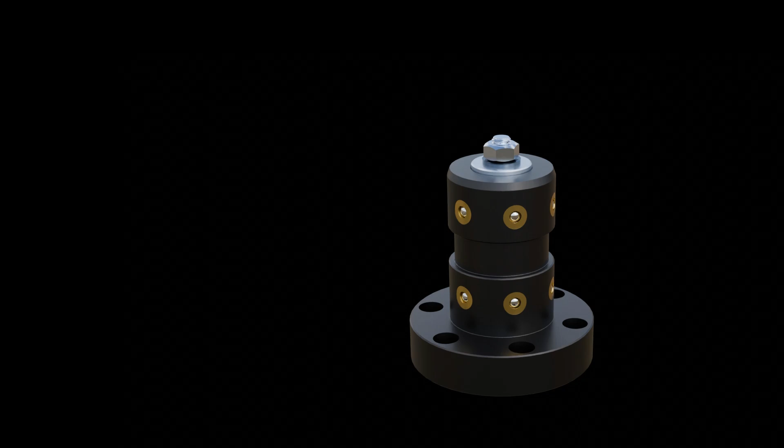Hi everyone! In this video I'm going to show you this clamping tool which clamps on the inside diameter.

The base body is a rotationally symmetrical part in which steel balls are mounted which are able to move in radial direction. These balls can practically be bearing balls which are available in different sizes.

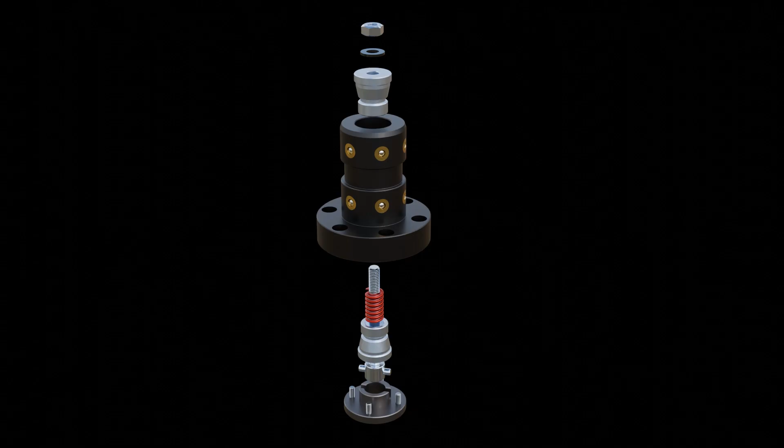This tool consists of the following parts: the base body, support with an anti-twist groove, fixing screws, threaded rod with a shoulder,

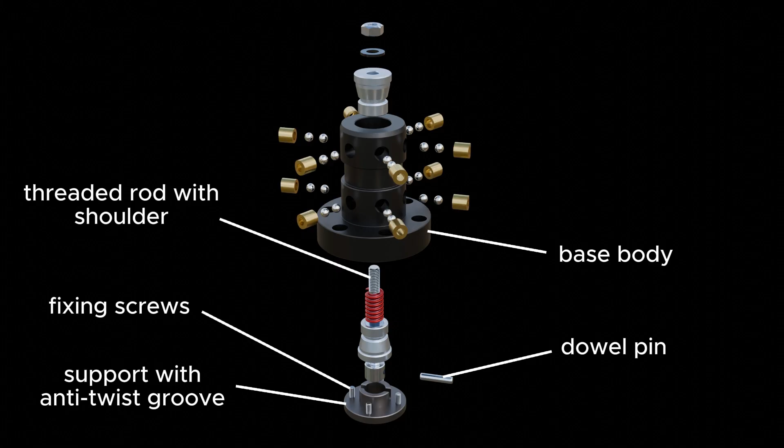a dowel pin, and two identical tensioning elements made of hardened steel to prevent impression of the balls.

Changing the angle of the cone affects the clamping force. Self-locking can occur at certain angles, making it difficult to release the workpiece even after loosening the nut at the top.

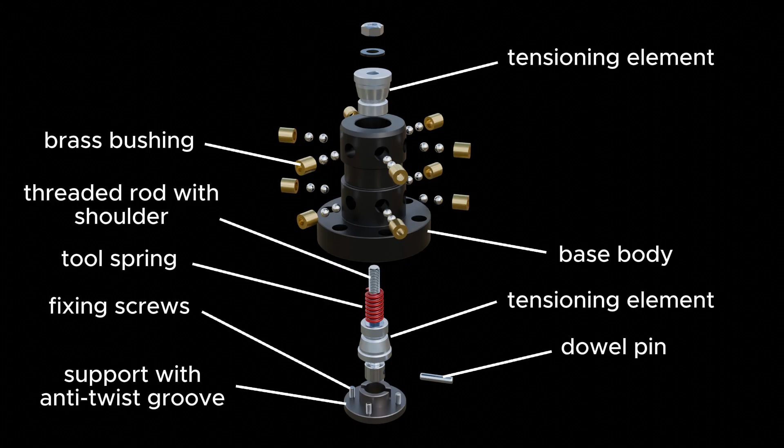A strong tool spring, many brass bushings, a lot of bearing balls, a washer and a nut create the clamping force.

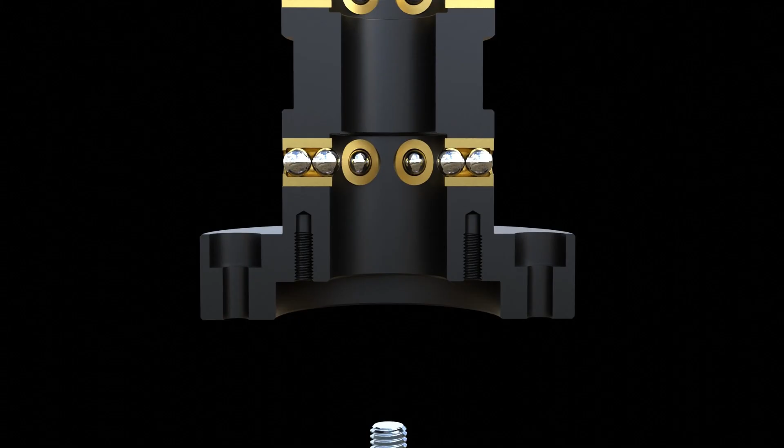The bushings can be press fitted or glued into the base part. At the end there is a small flange to prevent the balls from falling out. Using some higher density grease, the balls won't fall inside during assembly.

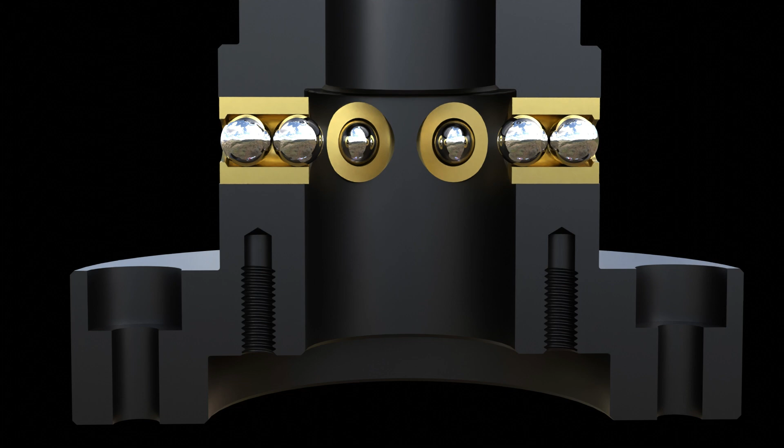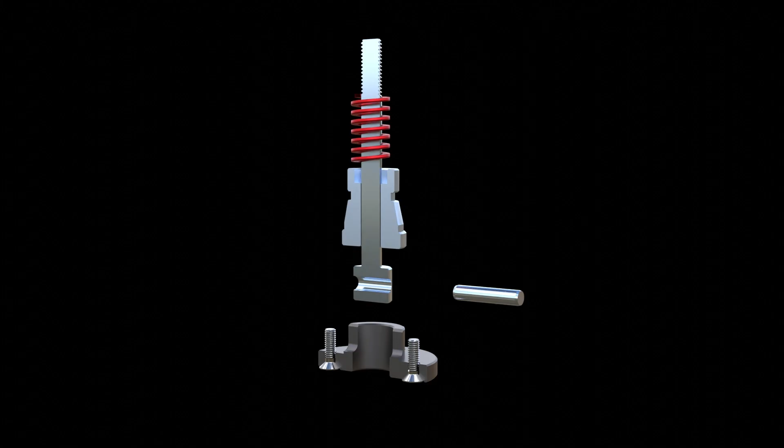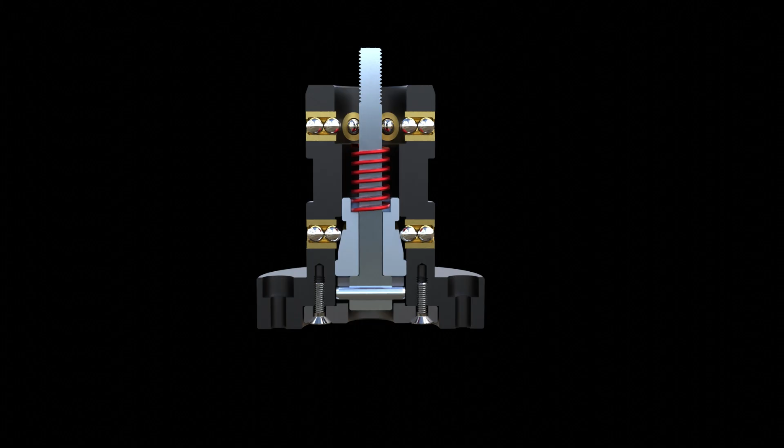The pin prevents the rotation of the threaded rod while allowing free movement in the vertical direction. At this assembly phase, the pin also prevents the rod from falling out.

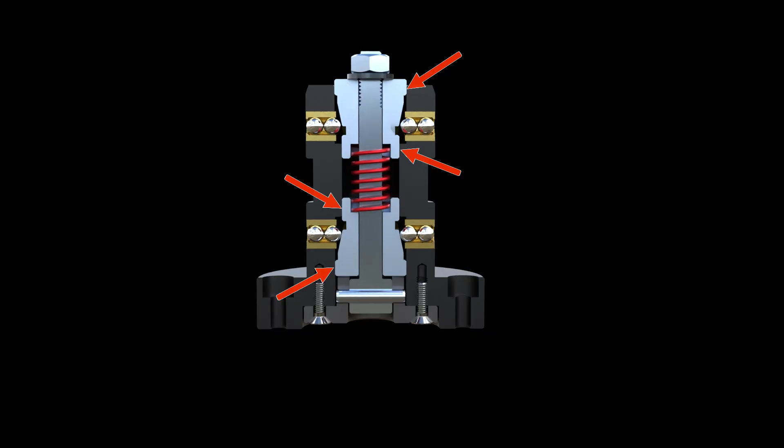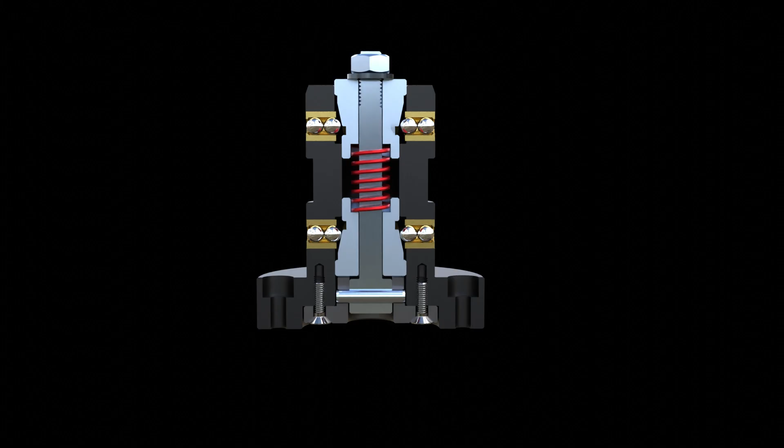The tensioning parts are guided inside the center hole with tight tolerances to ensure concentricity. The lower one is resting on the support part, so the balls are not yet forced outwards. The tool spring is holding the upper one, so the balls are not forced outwards here either.

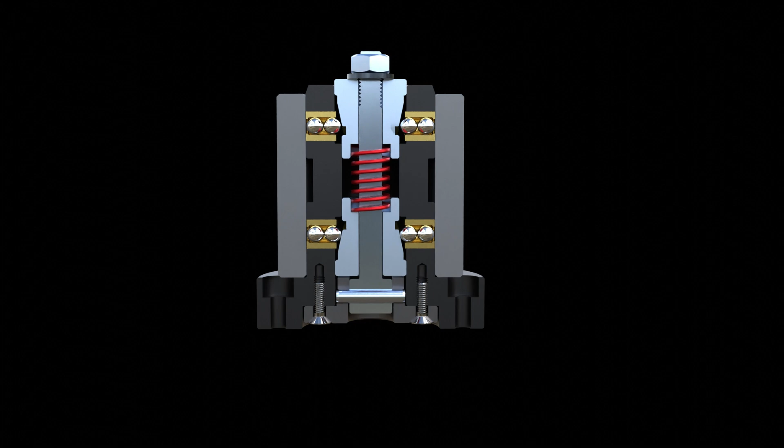In this state, the workpiece can be pulled onto the tool. Because the movement of the balls is strongly restricted in the radial direction, the bore of the part to be clamped must be only a few tenths of a millimeter larger than the diameter of the base body.

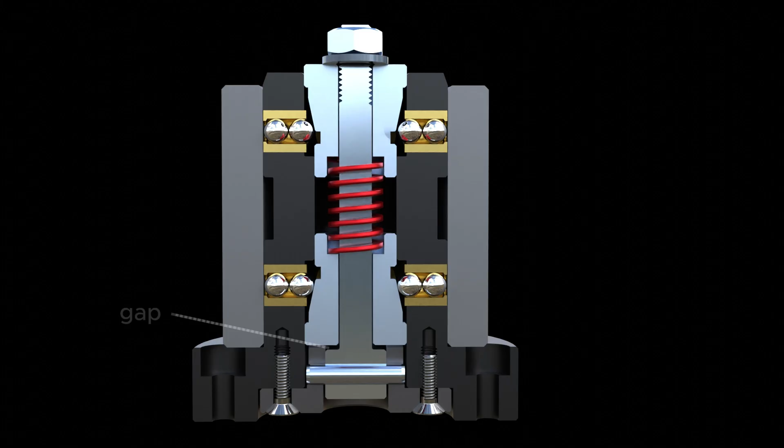Let's assume that the spring is untensioned and the nut is loose. There might be a gap here. Let's start tightening the nut.

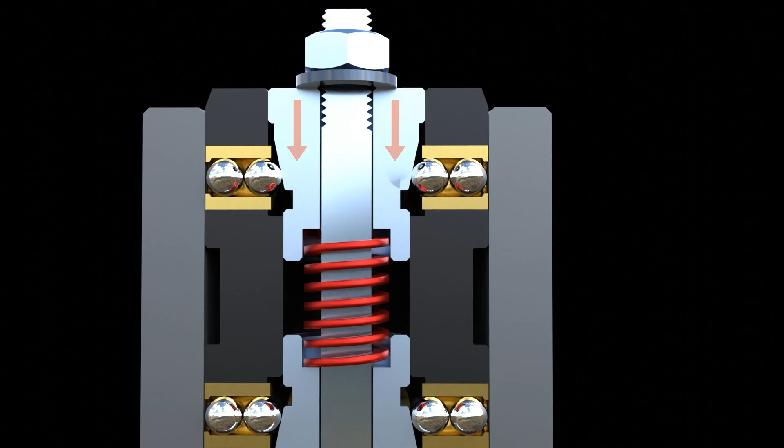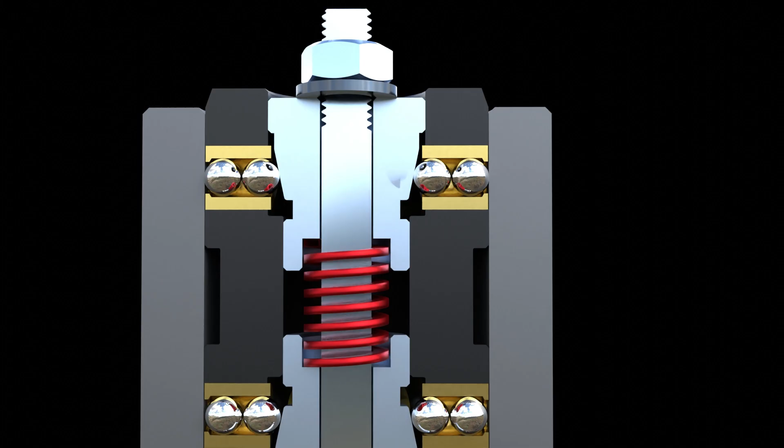After the shoulder of the screw reaches the lower tensioning part, the spring starts to compress. The upper tensioning part moves downwards and reaches the balls. When the balls reach the workpiece, the upper part cannot move down any further, so the lower part starts to move upwards and starts to push the lower balls out.

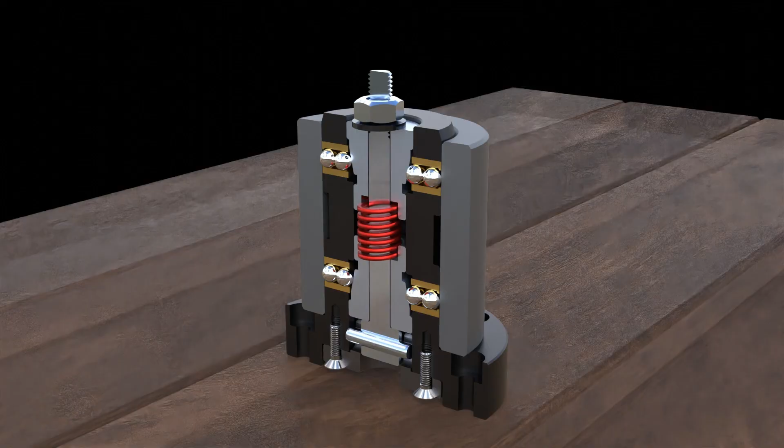If we keep tightening the screw further, the clamping force will increase. Please note that in case of soft materials, the balls may leave marks on the inner surface of the workpiece. Of course, the tool can be fixed to anything with screws.

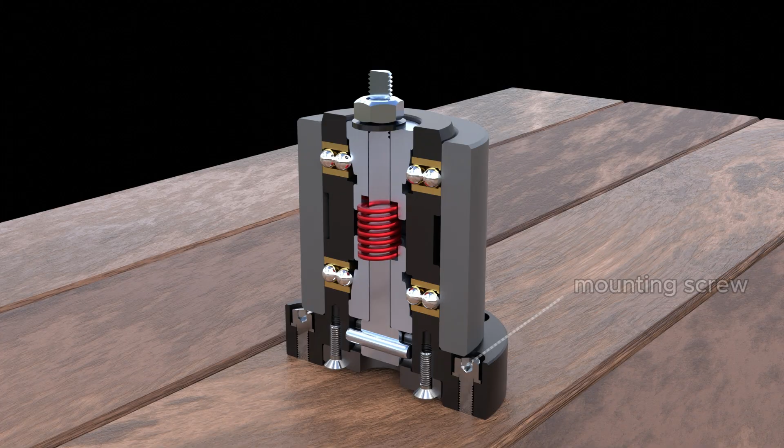At the end of this video, as always, I collected some advantages and disadvantages.

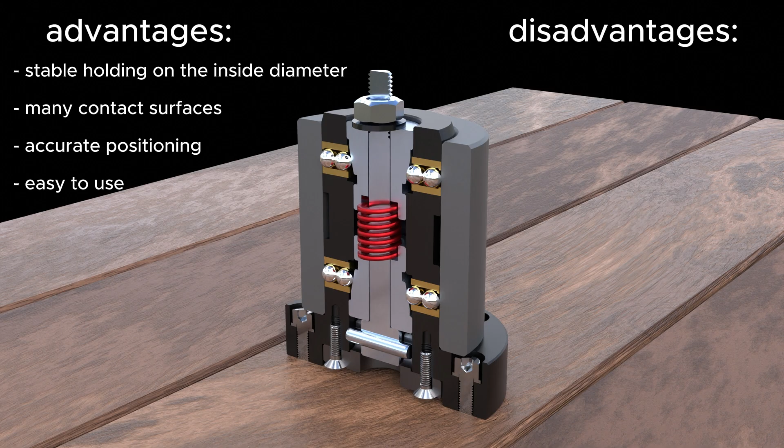Advantages are: the tool holds the workpiece stable on the inside diameter, many contact surfaces, accurate positioning, easy to use.

The disadvantages are that the design is complex and there are a lot of parts. The useful diameter range is limited. If the bore of the workpiece is too large, the balls can be pushed out too much, which can destroy the flange or push the whole bushing out.

Maybe a rubber flange can be used instead of a rigid one, so the balls can fall out and then be pushed back without causing any damage. For this, a different bushing design is needed, using maybe O-rings as a flange.